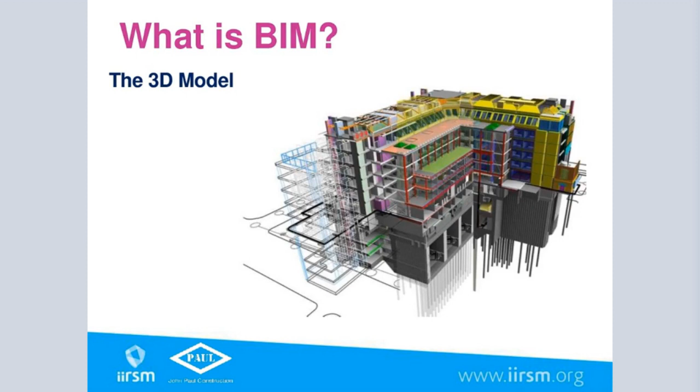It's come a long way since it started, probably 20 years ago, when they started using 3D modeling, but now it's driven much more. The 3D model is the base of it, but now it's driven into much more data management and information. The next component we're going to be talking about... this slide is in the wrong place.

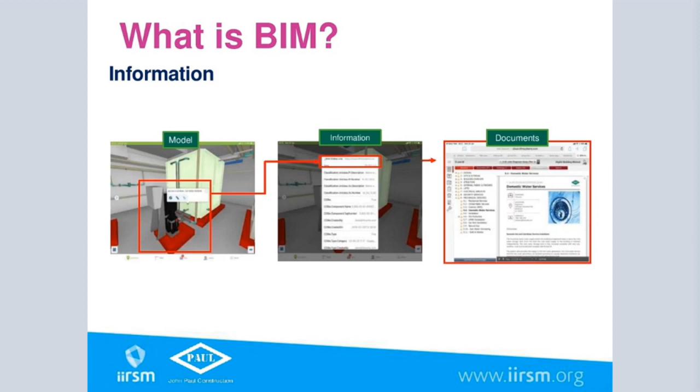And within that, there's standards, procedures, and methods. So that as a whole...

...is your BIM process. That's why it can be quite complicated, because you've got a lot of stakeholders, a lot of different organizations working with different procedures, different technology, all with different requirements and expectations.

And so to create a collaborative process, you need all this to come together, so everyone's working together in shared procedures, shared methodologies.

That's the key part of what I think BIM has given a lot to the construction industry in the last couple of years, where people have really worked hard to create these shared environments.

This leads us into the next section, which is collaboration. So collaboration is what BIM's about.

It's about a shared team coming together and collaborating to deliver a project, an asset, or a building.

And the BIM processes really facilitate that, and they drive people to work towards better collaboration, transparency, trying to build up levels of trust.

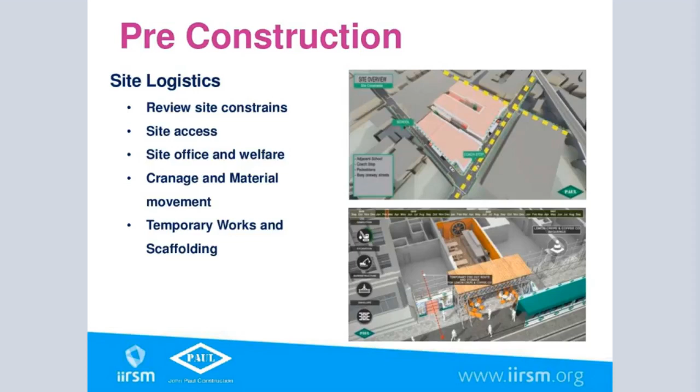Further on the site logistics, we model all our hoarding, access, egress into the sites, and produce visuals. We're looking at the surrounding environment. These visuals, typically, we've got to engage with local authorities, local businesses, and local communities to show them how we're going to impact their environment. In some cases it's a requirement, especially from the local authority, that we need to get approval for hoarding license and things like that.

So more often than not, when we're encroaching on the road or doing road closures, we'll do 3D visuals and graphics to show how that's going to impact on the public interface. We're also heavily involved in the Considerate Constructors Scheme, and we spend a lot of time engaging with local communities to ensure that we minimise our impact onto the local community, and that we communicate what we're going to be doing, how we're going to be doing it. And these visuals, being able to give a 3D visual graphical representation, really enhances that process.

So being able to go to a community group which may not be technically minded, being able to either show them a video or a storyboard to say this is what the construction site will look like really helps them visualize what the impact is going to be. And then when we're doing the work during construction, there's less animosity. They've got more forewarning of what things are going to look like, so they're better engaged, and it's a more positive process.

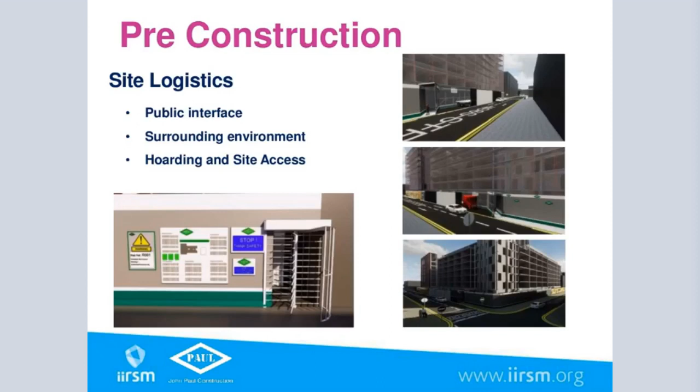The 4D BIM, this is from that logistics and planning. Now 4D is the next dimension to BIM, where we add time. So you've got your 3D spatial graphical representation, and what we do is then apply our programs and add time to it, so that as elements progress, we can see the elements build through time and the different phasing and sequencing of the construction.

Because as we phase and sequence through the construction program, our site logistics will change. We may have additional cranes, cranes might move, our entrances will change, and you really need to be able to map that through. You may have a demolition phase that you need to show before you can even start any enabling works and things like that.

So being able to map that through in 3D and really sequence those works, we can then see some of the interfaces between complex trades, facade, structural steel or precast and groundworks that may all be happening at the same time. How are their deliveries or material storage or their sequence of work going to impact on each other? How do we mitigate risks where we don't have people working overhead? So we need to look at that in 3D. A lot of that we can work out and sequence using programming plan and from our previous experience, but when you map it out in 3D, it really exposes some areas that you may not have been aware of, or different complexities or risks that you may not have seen previously in 2D when you've looked at the chart.

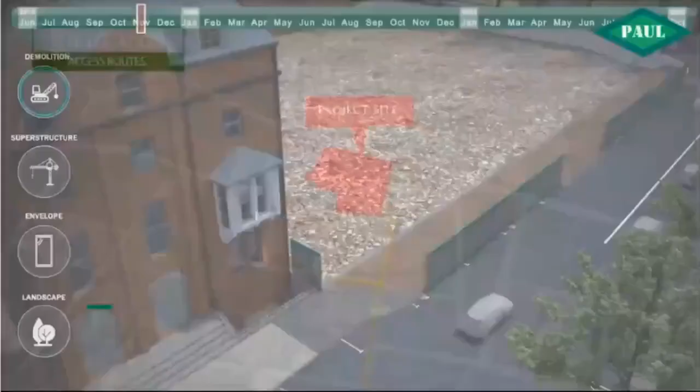So you can see here we have the overall site, just to give perspective of where it is. Some of our site entrances, and as I said, temporary works and erection of cranes is a big issue and can be quite difficult in city centre locations. Logistics of cranes and sequencing of structural steel deliveries.

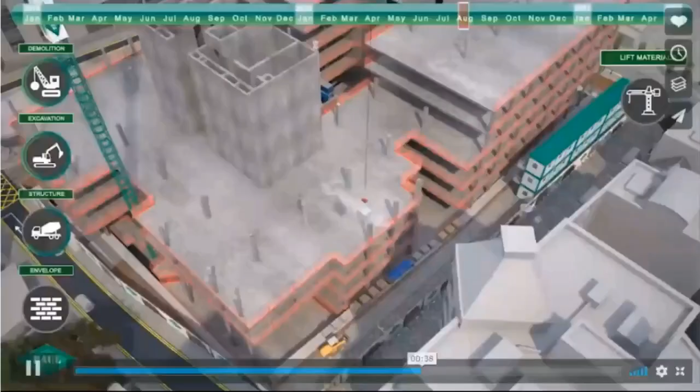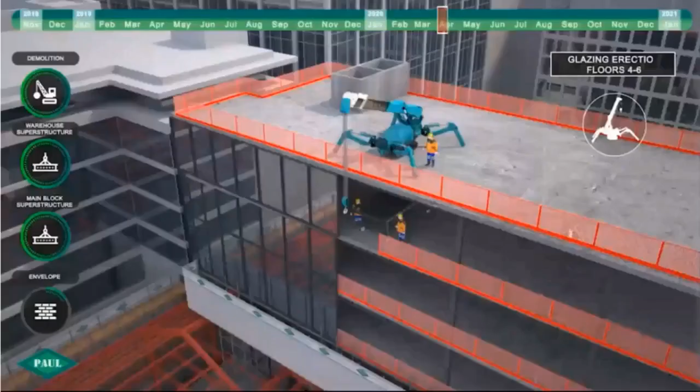Material handling, how we're going to move materials across the site, and various stages of the project through demolition, superstructure, hoarding, scaffolding, and sequencing of high-risk activities.

So yeah, from that video you can see that's only a snippet, and I've just taken a slice of a number of different animations, but it shows the different sequences we work to and the different levels of detail in various activities.

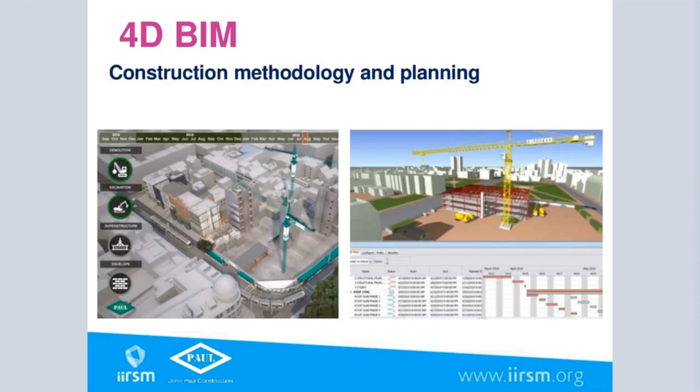So here's another one of our projects we've worked on, a distribution centre in Newbridge. It was a very large site, quite different from our city centre sites, as it's not a lack of space issue - we had plenty of space for storage, but a lot of the site was taken up by heavy civils and excavation works, meaning we had to spend a lot of time segregating vehicle and plant movement from pedestrian movement.

We modelled all our walkways and vehicle and pedestrian movements in the model, and these were used as the day-to-day models that the guys on the ground look at when considering the sequence. They can also see our health and safety access and egress routes in the model, so not only do they see it physically, but when looking at the model and planning their works, they can see how it impacts the different access zones.

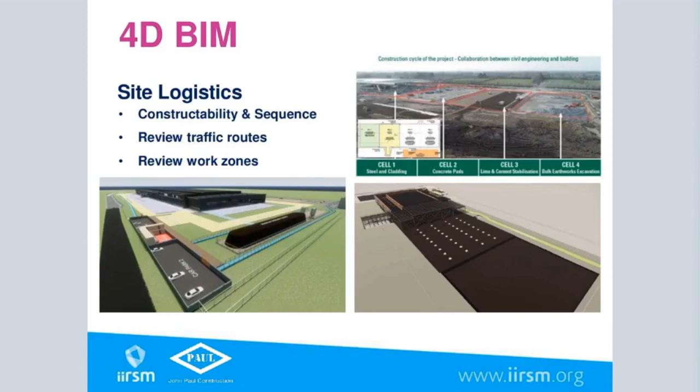BIM to mitigate risks - I've spoken quite a bit already about how we use logistics planning to mitigate risks, but right from the get-go on a project, one of the key things we look at is our high-risk activity workshops. We have specialised workshops with senior management and directors involved, that tease out all the high-risk activities taking place across the life of the construction project.

These activities are pulled out and looked at in much more detail than our general day-to-day work. We still require risk assessments, method statements, and detailed planning for day-to-day activities, but we highlight a list of maybe 20 or 30 activities we see as high risk - either working at height or where there's potential for a serious accident or loss of life. These activities we look at in a lot of detail.

There are numerous meetings and workshops that happen before anyone even turns up on site to start the works, and directors and senior management are always involved.

So on these activities, the use of BIM, 3D modeling, and sequencing out some of the detail that maybe on an overall plan you wouldn't look at. For instance, the sequence here for this job at Sir John Rogerson's Quay, we had to lift in these three 20-ton steel beams that were bridging this 10-metre span. Because of the weight of them, the tower cranes on site couldn't lift the beams, and there was insufficient space on the surrounding streets to put a 300-ton mobile crane.

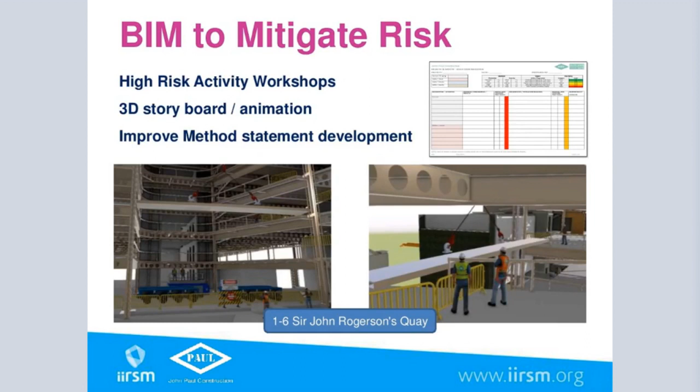The use of 3D model risk warnings. So within our model, we have various signs and signage that we actually include into our logistics model. So not only do we put all our own plant machinery, the cranes and various temporary works, we also put these risk warning signs.

Here, the signs also have information attached to them—you can see the 3D object, but there are parameters there. So we have a risk reference, and we have a number of risk warnings that can be added to the sign. This can all be scheduled out, so we can have a schedule and a list, and then you can change and update that list as the project progresses. Your risks will change, so these risk warnings need to be changed and updated.

So it really brings that visual content, especially when people are using the models in our weekly or daily huddles, where they're looking at, okay, we're working in this area, we're building this wall. These risk warnings are there, so they may not have seen the full risk register or been aware of something, but when they're planning out their works, they can see this risk warning and go, okay, there's a crane here, it's going to be working overhead, or whatever that risk may be—fall from height, or there may be utility services under the ground.

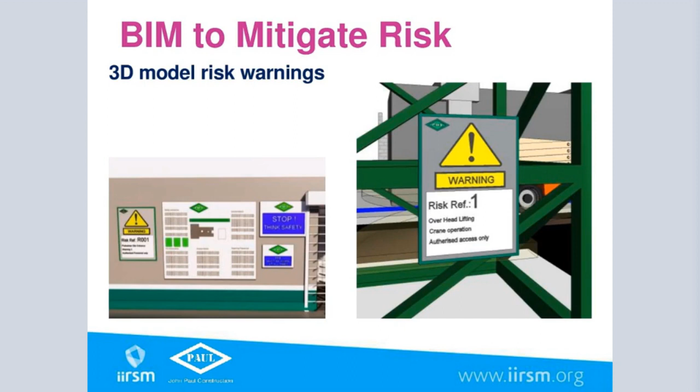The other key element we use is visual information tools. These are used extensively especially for our safety signage, information notices, especially within the construction industry. There's such a varied, multinational, multilingual workforce, and being able to show graphical images with text really enforces that.

Like that graphic I showed at the very beginning where it said visual content is king, and it really is. It really improves the impact your message has and how they receive it and how they retain the message.

You can see from this graphic where we had a safety campaign regarding moving plant, because it's one of the number one risks on site, understanding the areas and zones you can move in, how to approach, or where to stand or not stand, with regards to different types of moving plant, because they all have different blind spots. Trying to understand that, if you just had text, it would be very difficult to conceptualize where those spots are, but having a 3D image really improves that message.

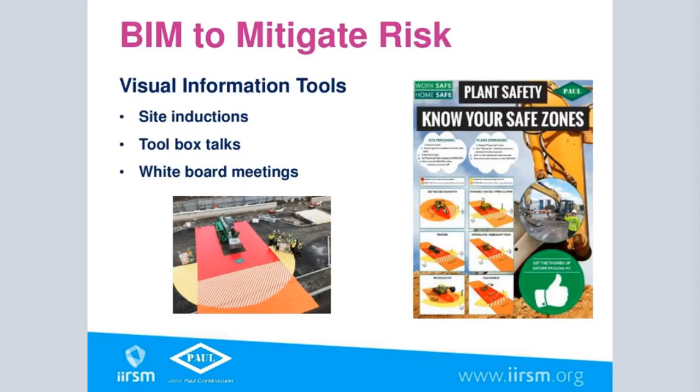Digital tools have been heavily used now in recent years, and I think BIM has been one of those drivers where we've looked at digital tools. There have been great innovations in technology and software, and really good applications on how we use it on site in construction. Construction is starting to leverage some of these tools, and it's an exciting era - they're really mitigating lots of the risks we may have on day-to-day sites.

The clear example is the Lidl Distribution Centre, which I mentioned before. The site was an 85-acre site - it was huge. Even the weekly safety audits that the safety officer would do would take them nearly 3 hours by the time they'd walked all the areas and circled the site and come back around again. It was really a long journey.

So what we used to do, maybe 2 or 3 times a week, was fly the drone and do a big flyover right around the site. That would be about a 2-minute flight path around the site. The safety officers could view that and very quickly hone in on areas they needed to spend more attention on, maybe housekeeping issues, or access/egress issues with plant that can be difficult to see at ground level.

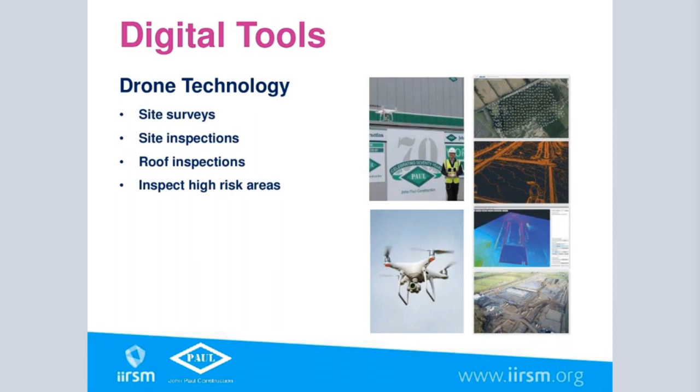Live site cameras have also become very popular in recent years, and all our projects now have these live site cameras, which may have 1, 2, 3 or 4 cameras on the site showing a complete live feed. They're being used extensively, more so than just for a site record, which they're invaluable for. If there's any incidents or you need to find out what happened when, there's a full historic record, and you can go back to any date, any time and have a full live recording.

I think it also creates a better safety conscious workforce, because workers aren't going to take inherent risks when they know they're essentially on camera. On a lot of sites, if it's out of sight, it's out of mind, and some workers may take inherent risks they shouldn't because they think no one's watching. So having live site cameras improves this transparency and gets people acting in the right way.

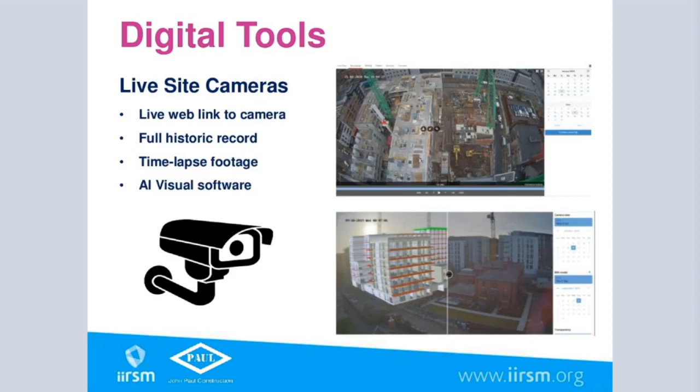Digital tools and field apps are also another area that is being heavily used. All our site inspections, safety issues, snagging, and all our drawings are done on digital field apps. Essentially it's about getting the information to the guys on the ground, our site managers, our foremen, whose job is to be out on the construction site getting the work done. So it's about getting the information into their hands readily available, having streamlined workflows for them.

If there's safety issues or housekeeping issues, they can take a photo, raise the issue, assign it to the subcontractor and send it. They can do that within a minute and it's done, they know it's gone out, and emails are automatically sent out. Various people on the team will be tracking those issues and following them up. Whereas before they might have taken a picture on their phone, and then a few hours later, back in the office, if they remembered, they would upload that picture - or they might forget to.

They might then track down the email, send an email, or print it out. There's a quite long-winded process, and then the same again when they're trying to close it out. So these field apps greatly improve the efficiency of how we can deal with day-to-day issues in a live site environment. I think it's a great tool for improving safety and getting people to react.

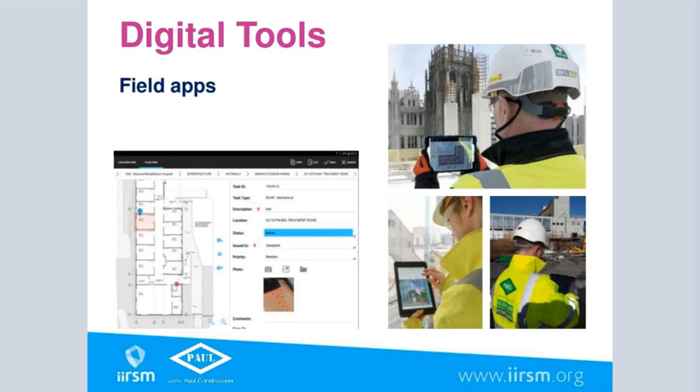You can react much quicker to mitigate these issues. And 3D model viewers is another powerful tool. On all the tablets, on most of our sites, nearly all the employees have their own tablet where they can use the field apps, view documents, but also view the models.

So there's many different versions. Many of our projects we're using Dalux, which is the model viewer you see there in the corner. That's a really good viewer. It ties in the 2D drawings, which most people are familiar with using and navigating, with the 3D model. So you can either navigate directly in the model or navigate on a drawing.

So you choose your floor and it shows a drawing and plan of the floor plate, and then you just point and press where you want to be standing, or where you are standing, and you can see what's in the model. So if you're in early stages and only doing some structure, you can open up the model and see where there's going to be services that you need to be aware of, or different elements, or these high-risk warnings that we have in the model. You can see them, that will be present in the model as well.

BIM 360 has also been used on a number of our sites. Very similar, has a model viewer, also linked to all the documentation. It's linked to Revit and some of the authoring software with Autodesk. They have very good viewers. All the viewers are pretty much of a muchness, but it's about getting that model into the hands of the guys on the ground.

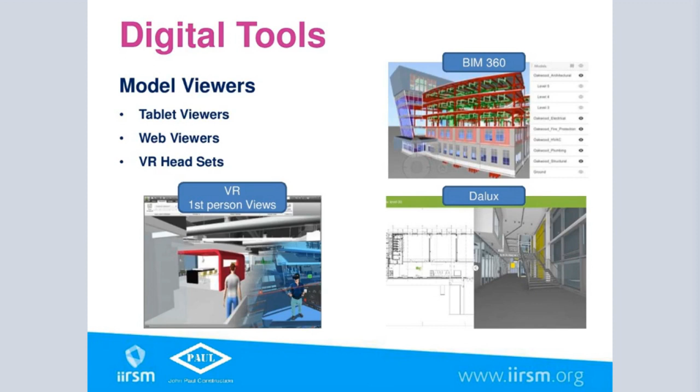So that's my discussion on BIM and the various elements we use to mitigate risks in construction. We use it heavily, extensively in the pre-construction and planning stage, but there's also power once we're in the live construction phase, using it day-to-day for planning, logistics, safety reviews and risk mitigation, getting it into the hands of our foremen, project managers, engineers, and tradesmen, so they're also engaged in the process.

Many times it's just visual content, but that visual content is still powerful. So I think that's my message for today: getting that visual content to the greater team really gives power to the information and helps people process and retain it. And I think that's the key power for BIM and how it can mitigate risks. If people are much more informed of what they're doing, they're obviously able to plan and mitigate risks in a much more processed manner.

So to recap, visual information is king. You'll probably see through that presentation why visual content is so important. The 3D models are made up of graphical information, data, textual information, and processes around people and how we do things. 4D BIM is the 3D models over time, adding that time element. In pre-construction planning, we use BIM heavily to sequence out how we're going to construct the building, constructing it in virtual reality first to tease out any logistic and spatial issues we may have.